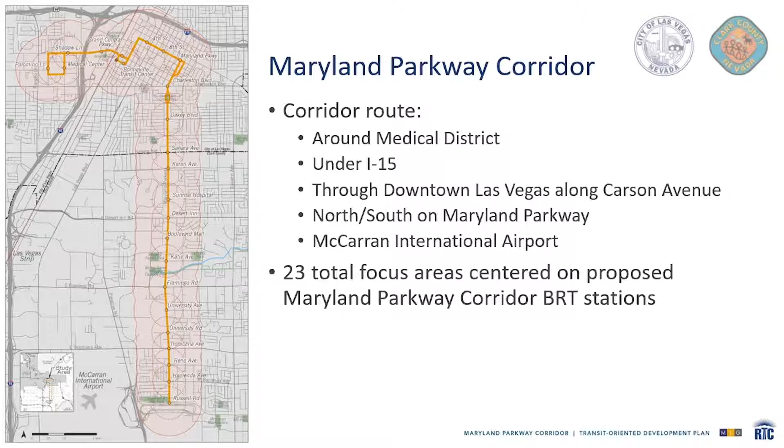In the city of Las Vegas, the focus areas include a half-mile radius around each station, so 1 mile across, focusing on the medical center station within the medical district, the Bonneville Transit Center on the west end of downtown, and the Charleston Boulevard station along Maryland Parkway. In the Clark County portion of the corridor, where the dividing line is Sahara Avenue, we actually included Sahara Avenue with a quarter-mile radius. Again, that would be half a mile across for the focus area, Desert Inn Road, Flamingo Road, and University Road.

The last piece that I'd like to touch on before handing it over to Andy is highlighting a couple of the key reports that informed the focus area plans, which we developed as interim deliverables throughout this effort. Reports developed as part of this project included existing condition analyses for the entire corridor, including all 23 stations.

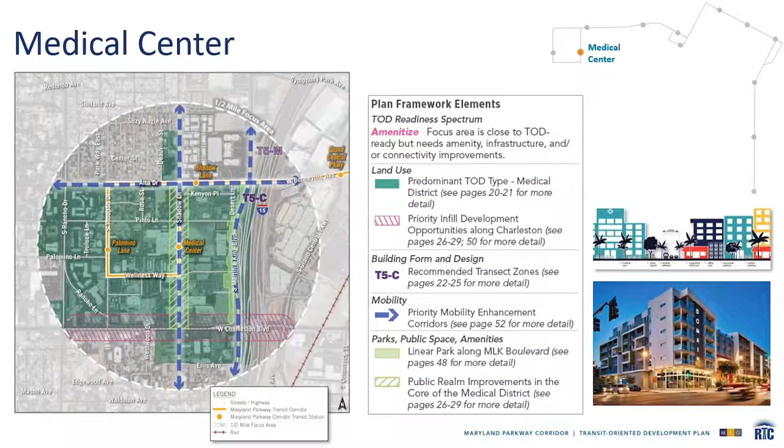For each TOD plan, we've identified a handful of priority projects that are aimed at improving infrastructure, creating or enhancing amenities, and/or kickstarting development in a way that is truly transit supportive. Think walkable, connected, and convenient for those who wish to use transit. All of this is done in an effort to help achieve the vision expressed by the community for each unique focus area.

So within the medical center, our first priority project deals with the intersections along Shadow Lane. The Medical District Master Plan already envisions a really bold future for this area within Las Vegas, and it looks at Shadow Lane as serving as a sort of main street within the medical district. What this priority project is recommending is to really leverage that identity and create a stronger sense of place.

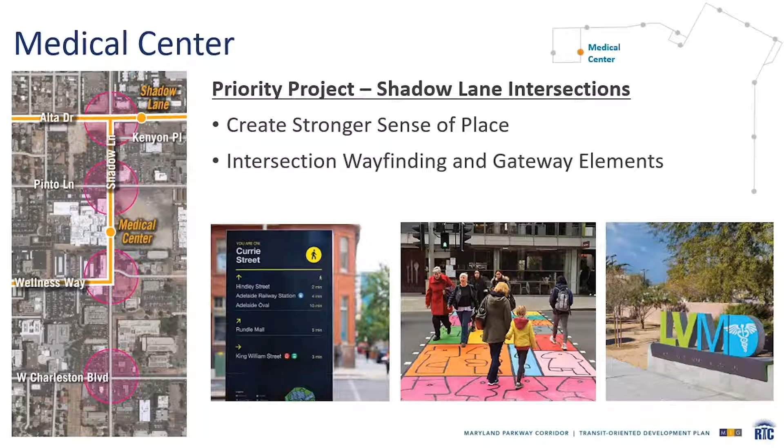By picking key intersections along Shadow Lane that can be treated in an extra special way, including wayfinding, gateway elements, perhaps intersection paint treatments, things that really lend to a strong sense of place and identity for the community, but also connect people really intuitively to transportation options.

The second priority project in the medical center looks at the eastern edge of our focus area and recommends a linear park along Martin Luther King Boulevard. Martin Luther King Boulevard today is a fairly well-trafficked, automobile-oriented corridor, and an investment like this would help amenitize that edge along Martin Luther King Boulevard to try to make it truly pedestrian-oriented, helping to accomplish the overall goals of making the environment more walkable within the focus area.

This would be an opportunity for the city to work with existing and future property owners to identify opportunities with underutilized or unused space in front of the properties along Martin Luther King Boulevard to try to help amenitize this space, again, for more pedestrian-oriented use.

Amenities that could come along with this type of investment would be increased tree canopy and shade, the opportunity for a wellness trailhead that would connect directly to the medical district along Wellness Way, opportunities for pocket parks along this new trailhead, and a generous buffer that would allow pedestrians to feel safe and comfortable moving north and south along Martin Luther King Boulevard, set back from traffic.

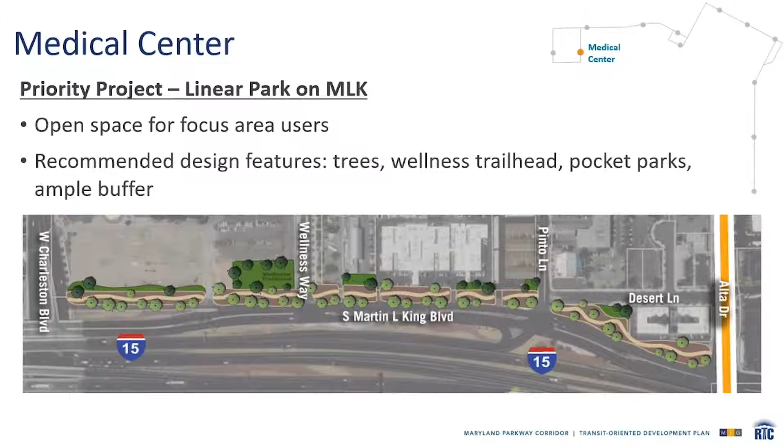The third priority project really looks at trying to diversify the mix of uses within the medical center focus area. Obviously, within the medical district master plan, the vision for this area is predominantly medical uses. This priority project, though, aims at trying to encourage new development to be really intentional about the mix of uses that it includes along with those medical uses.

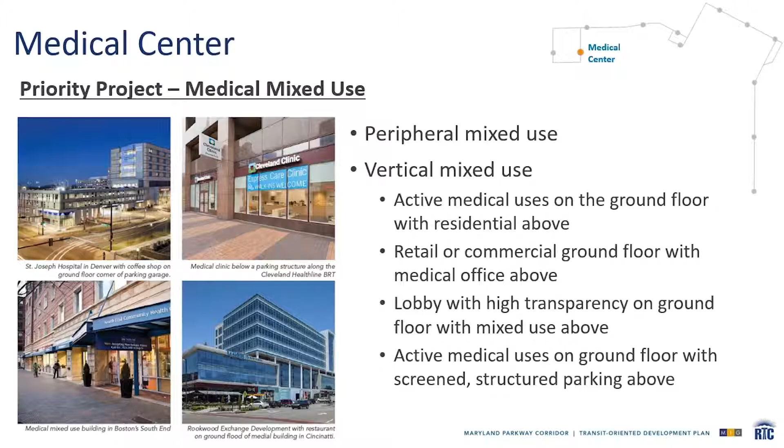For example, trying to integrate residential uses above medical uses in an effort to create activity outside of traditional working hours and the traditional work week. And similarly, being really intentional about getting uses on the ground floor that help contribute to the activity of the streetscape and provide opportunities for those individuals using the medical uses to spend time outside of either their appointments or working days, just opportunities to socialize and recreate.

Our final priority project within this focus area looks at development and pedestrian comfort and amenities along Charleston Boulevard. Charleston Boulevard in this case serves as the southern edge of the medical district itself, and this priority project aims to provide recommendations for building frontages, heights, densities, an appropriate mix of uses, and the corresponding pedestrian amenities that would come along with that strategic infill to help transform this portion of Charleston Boulevard into a true gateway for the focus area and into the medical district itself.

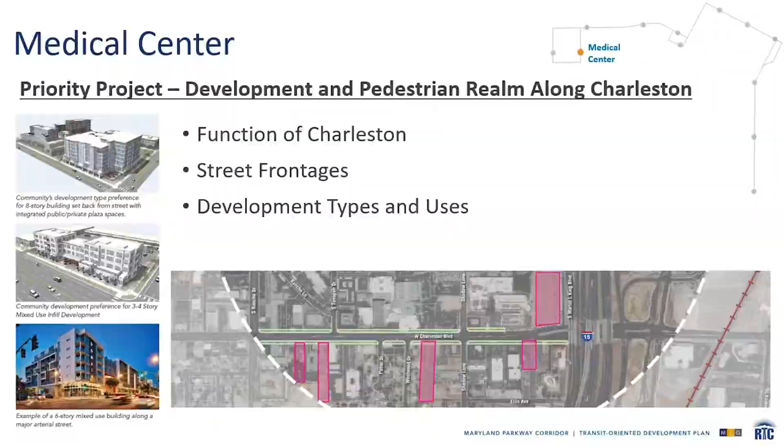This focus area is centered around the Bonneville Transit Center in central downtown Las Vegas. Currently, this area is primarily commercial, office, and civic land uses. There are also community facilities and a good amount of vacant land, but limited residential options. Major destinations or landmarks within this area that you might recognize are BTC itself, the Las Vegas North Premium Outlets, Symphony Park, the Las Vegas City Hall, Clark County Government Center, and many more.

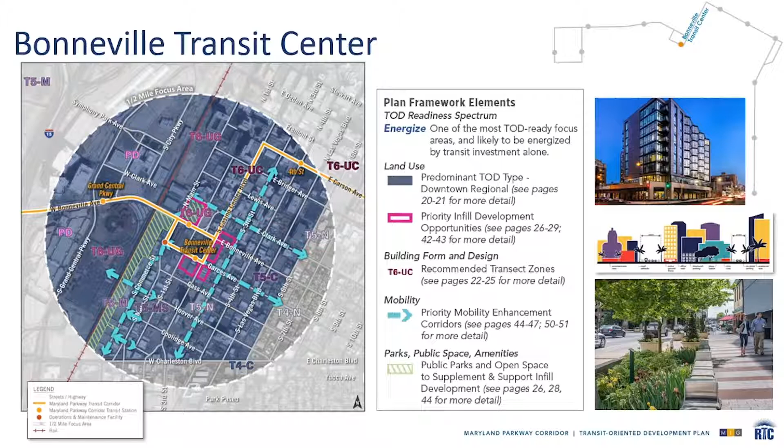For each TOD plan, we've identified a handful of priority projects that can really help improve the infrastructure, kickstart transit-oriented development, and achieve the community's vision within these focus areas. The first project within the BTC focus area is BTC and Civic adjacent development opportunities.

As seen on the map in pink, there are opportunities to combine parcels that are currently vacant or underutilized and integrate a mix of uses, especially with active ground floors with office or residential above that create an active and walkable pedestrian environment. There's also the opportunity for a TOD interfacing civic space at the block between Main, Bonneville, First, and Clark. A conceptual rendering of that block is shown on this page.

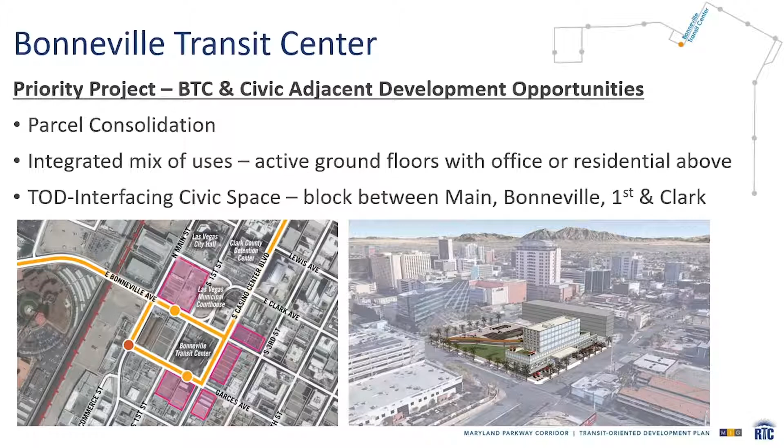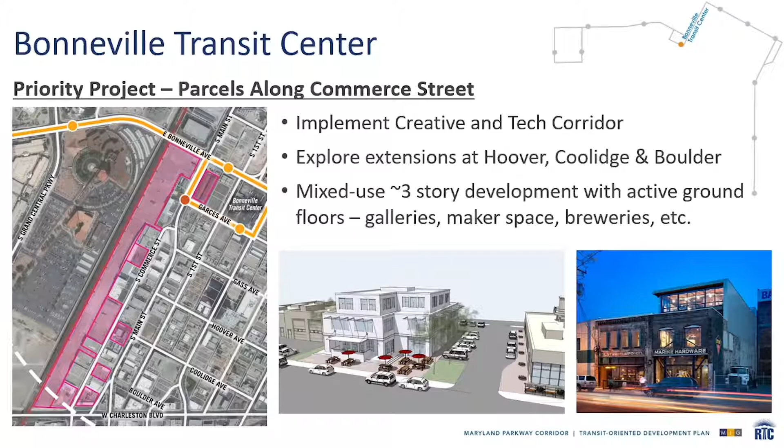New development is envisioned to be about 3 stories with active ground floors, maybe with different uses such as galleries, makerspace, or breweries.

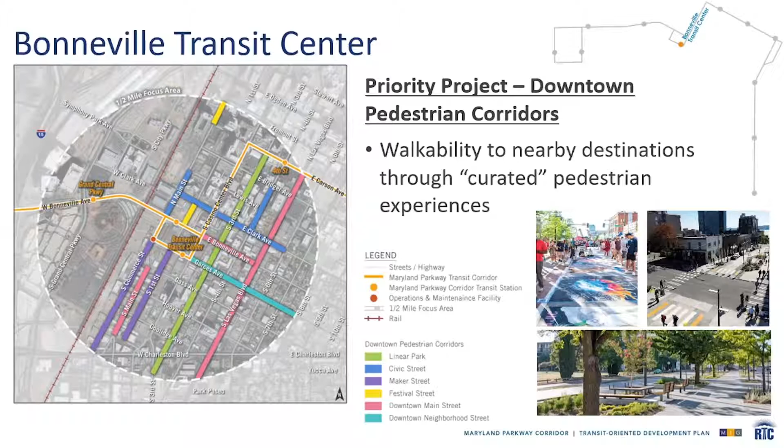The last priority project for the Bonneville Transit Center focus area is Art District branding and wayfinding. This project looks at leveraging all the recent work and momentum from 18B Art District and continuing to realize that cultural hub character. The plan looks at additional options for amenitizing the public realm with branded elements, implementing a pedestrian-scaled wayfinding program, and pairing that with design standards that enrich and preserve the unique character of the area.

The next TOD plan we'll take a look at is for the Charleston Boulevard focus area. Like the Medical Center and Bonneville Transit Center focus areas, this focus area extends a half mile in all directions from the proposed station location, in this case the intersection of Maryland Parkway and Charleston Boulevard.

The area is currently made up of primarily single-family residential uses in the southern portion of the focus area, with a mix of commercial uses in the north and along Charleston Boulevard itself. Major destinations and landmarks within the area that you might be familiar with include the Huntridge Theater, Huntridge Circle Park, the Las Vegas Academy of the Arts, and John S. Park Elementary School, among many others.

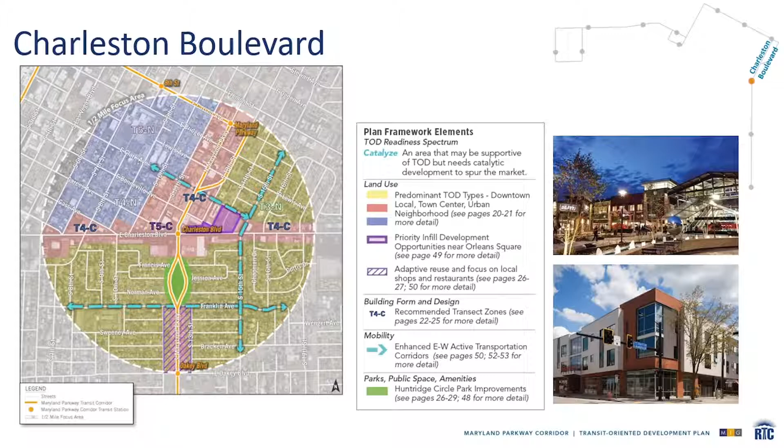This plan also identifies improvement opportunities for Huntridge Circle Park and the adaptive reuse of buildings along the Maryland Parkway corridor to help retain their local character while leaving open the opportunity to evolve into different uses in the future.

As you've seen for each of the TOD plans, we've identified a handful of priority projects here in the Charleston Boulevard focus area that are aimed at improving infrastructure, creating or enhancing community amenities, and/or kickstarting development in a way that is truly transit supportive to help achieve the vision expressed by the community for each of our unique focus areas. For the Charleston Boulevard focus area, the first of those priority projects looks at improvements to Huntridge Circle Park.

This priority project aims to establish Huntridge Circle Park as a community destination, both for the surrounding neighborhoods but also for new transit users within the area.

It's important to note that the recommendations within this priority project amount to more than just cleanup. We've heard concerns from the community about safety and visibility, and longer-term solutions look at including security, long-term maintenance, and management both of the park and the surrounding amenities, whereas short-term solutions look at more soft enforcement and directing those that are occupying the park for longer durations towards community resources and social services.

The second priority project in this focus area provides recommendations for development near or within Orleans Square, and particularly along the frontage of Charleston Boulevard.

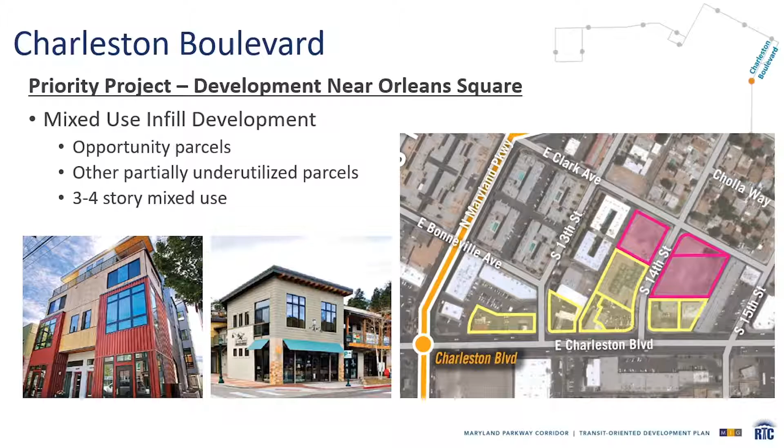This priority project looks at opportunity parcels and underutilized parcels within this smaller geography and provides recommendations on the types of mix of uses, building heights, and densities that could help frame a consistent edge along Charleston Boulevard, making it more pedestrian friendly and providing a comfortable transition from downtown into the neighborhoods.

The final priority project within this focus area looks at how best to connect the nodes that already exist within this focus area to the surrounding neighborhoods themselves. Building off the momentum of the previous project that looked at development and infill opportunities in and around Orleans Square, this priority project acknowledges the existing mixed use and commercial development momentum around the intersection of Charleston Boulevard and Maryland Parkway, as well as along the frontage of Maryland Parkway south of Huntridge Circle Park.

This priority project then looks at opportunities to connect those nodes better to the surrounding neighborhoods and into and out of downtown, with stronger east-west and north-south bicycle and pedestrian connections. It also speaks to continuing the house-to-business conversion trend along Maryland Parkway that helps retain the unique character within the focus area while still providing opportunities for uses to evolve over time.

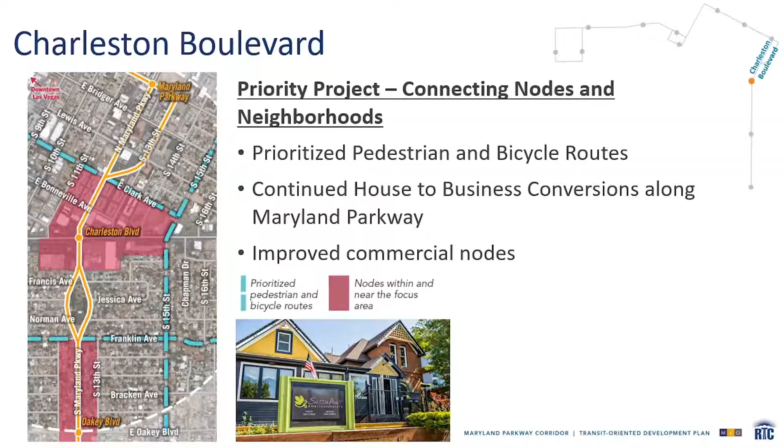This focus area is centered around the station at the intersection of Sahara Avenue and Maryland Parkway. Here we're looking at a half-mile radius from the station. The focus area is half within the city of Las Vegas and half within unincorporated Clark County.

Currently, this area is primarily commercial land uses with some supportive multifamily residential. Major destinations or landmarks within this area include the John C. Fremont Middle School, City Impact Center, Commercial Center, New Orleans Square, Las Vegas Athletic Club, Smith's Grocery Store, and Baker Park.

This focus area has a somewhat unintuitive pedestrian network besides along the major corridors. This plan identifies a handful of connections as priorities for multimodal mobility enhancements. This plan also identifies the need for parks or open space near the major intersection to serve the community in the area, business patrons, and transit riders.

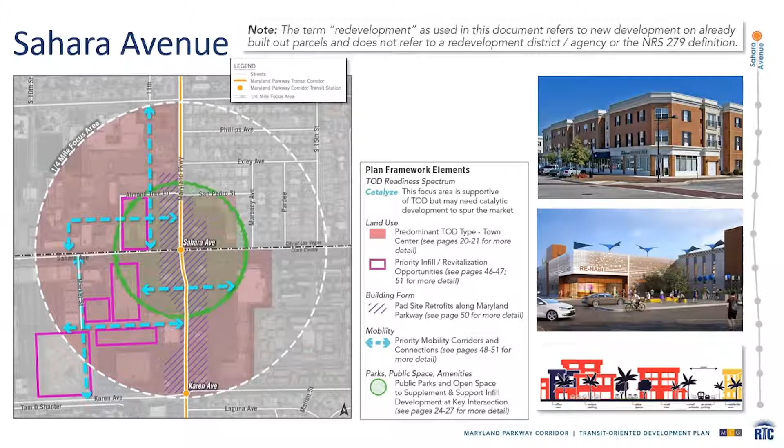The first priority project within the Sahara Avenue focus area is infill or revitalization opportunities on the southwest quadrant. Recently, the redevelopment agency has been reestablished in Clark County. There are opportunities within this area to develop mixed-use infill with an emphasis on affordable housing, especially on parcels that are currently vacant or underutilized. There's also the opportunity to reuse or redevelop existing vacant buildings. Within this project, we also looked at potential new connections, both east-west to Maryland Parkway and an extension of Market Street to the south, as shown in blue arrows on the map on this page.

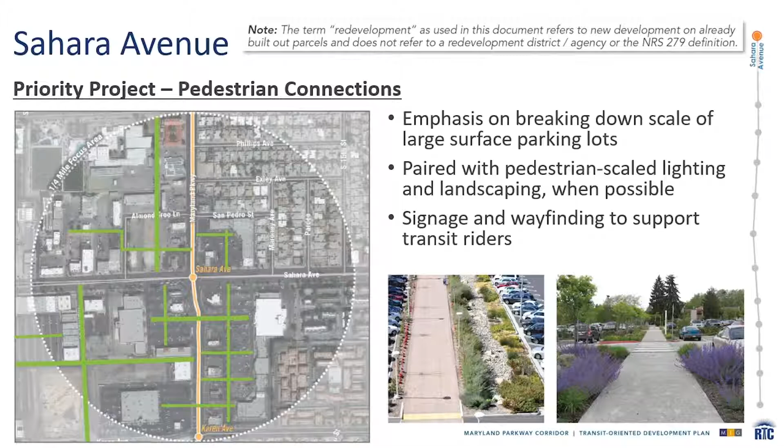The next priority project for Sahara Avenue focus area looks at pedestrian connections. This focus area has a lot of large surface parking lots without formal or safe feeling pedestrian connections between the stores and the street. This project has an emphasis of breaking down the scale of these large surface parking lots, as well as enhancing them through pedestrian scaled lighting and landscaping when possible. Also in these areas and along these connections, we recommend signage and wayfinding to support transit riders who may be navigating from the businesses to or from the transit station.

The next priority project in this focus area looks at the potential for pad site retrofits or urban design improvements, in particular along Maryland Parkway. This project is written in a way that different properties may reach different phases of design, as color-coded in these graphics and on the map. The idea is to transform these auto-oriented uses to be more transit-oriented and creating more friendly places for pedestrians and bikes.

Within the first phase, it could include landscaping and facade upgrades, as well as shade improvements. Second phase could include a drive aisle reconfiguration, seating outdoors, and transparency into the building to activate the pedestrian realm. Lastly, there's the potential for adaptive reuse of a pad site designed building, increasing the capacity of that building, creating a mix of uses, and removing the auto-oriented drive-through.

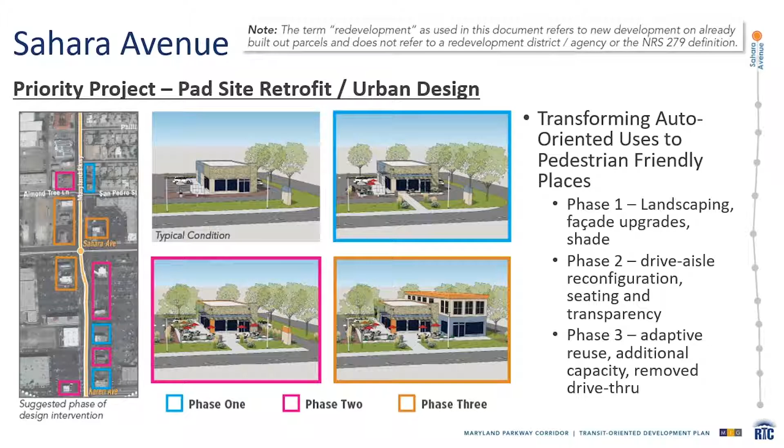The last priority project for the Sahara Avenue focus area looks at the possibility for redevelopment and public realm improvements in the northwest quadrant. Vacant and underutilized parcels in this prominent location provide both short-term and long-term redevelopment opportunities, should the property owners choose to do so. More short-term potential redevelopment opportunities are shown in an orange outline on this map. Blue outlines represent areas that are more long-term redevelopment opportunities due to existing buildings and potentially requiring the consolidation of parcels. The diagram also shows enhanced pedestrian connections in red arrows that would create a better network within this area. Any new development in this area is envisioned to be small-scale mixed-use or multifamily with active retail on the ground floor.

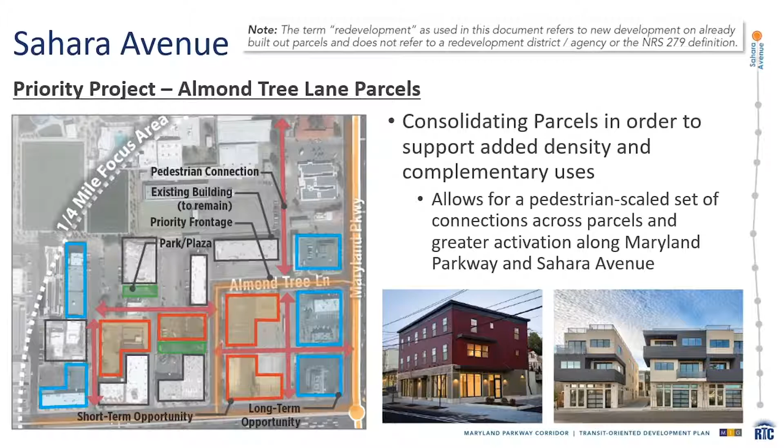This focus area is centered around the intersection of Desert Inn Road and Maryland Parkway, and it also extends a quarter mile in all directions from the proposed station location. Located just south of Sunrise Hospital, the area is currently made up of primarily commercial and supportive medical uses with larger areas of surface parking and a mix of single and multifamily residential. Major destinations and landmarks that you might be familiar with in the area include the Sunrise Hospital itself, Las Vegas Country Club, and Boulevard Mall.

...and voiced as a desire by the community thus far would be a mix of uses that supports the medical uses already existing around Sunrise Hospital, as well as a mix of shops and restaurants that nearby residents and transit users could easily walk or bike to and from.

The plan also identifies a handful of connections that would help provide safer access for nearby residents to the Maryland Parkway corridor itself. Finally, other recommended improvements include identifying opportunities for publicly accessible private open space that could be encouraged along with new development along the corridor, as well as enhancing the walkability to smaller commercial sites along the corridor itself.

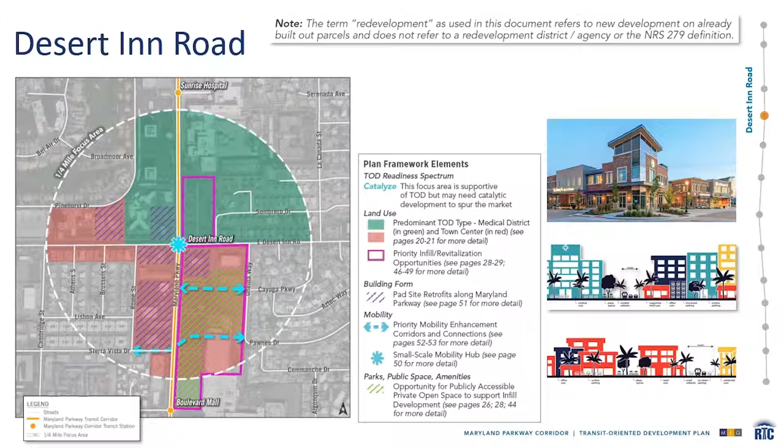As we've done for each of the other TOD plans, we've identified a handful of priority projects within the Desert Inn Road focus area that are aimed at improving the infrastructure, creating or enhancing additional amenities, and/or kickstarting development in a way that's truly transit supportive to help us realize the vision expressed by the community in this unique focus area.

Within the Desert Inn Road focus area, the first of these priority projects looks at infill and revitalization opportunities around the Boulevard Mall. This project recommends that as this area looks to develop or redevelop in the next 20 to 30 years, it should be really intentional about finding opportunities to provide additional community amenities. That can be in the form of publicly accessible private open space, a more varied mix of uses, and/or infill development right along the Maryland Parkway corridor itself to help create a more walkable and welcoming environment along that frontage.

Importantly, it also looks at providing safer and more intuitive connections across the large surface parking lots and into the neighborhoods to the east, making sure that residents have convenient and safe access to the Maryland Parkway corridor itself and opportunities for increased transit.

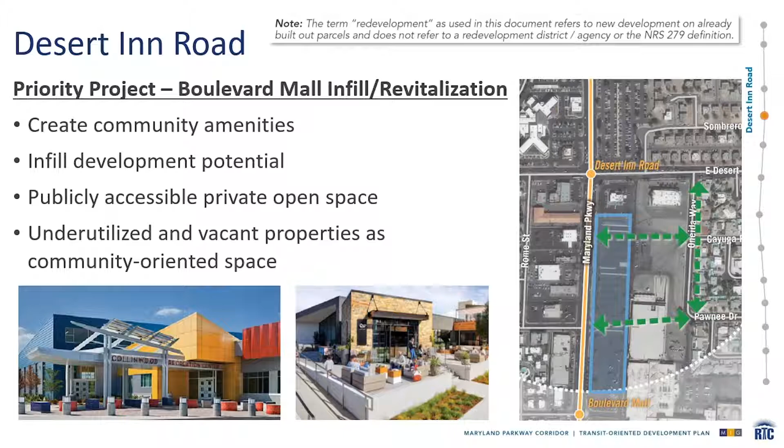This strategic infill could take the form of medical uses stacked on top of active ground floor uses like shops and restaurants, or in the form of residential and office opportunities stacked on top of medical uses. It could also take the form of a more horizontal mixed use, where an adjacent building that doesn't have a medical use could help support the activity and vibrancy of an existing medical use on the property next to it.

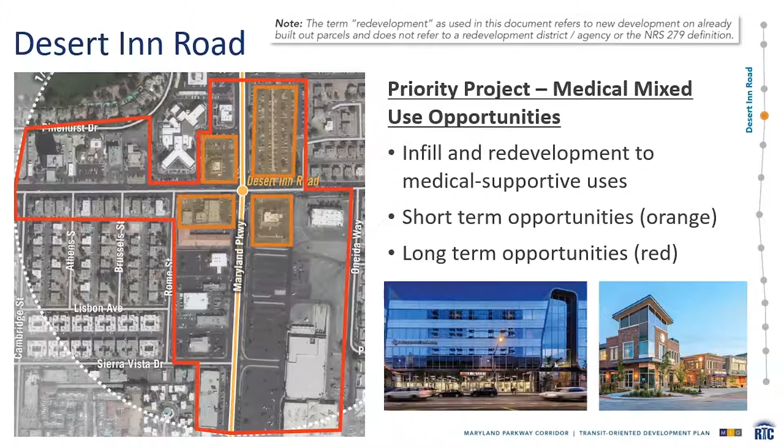Our third priority project for this focus area explores enhancements to transportation opportunities within the focus area. For this priority project, that comes in the form of a small-scale mobility hub opportunity that could be located nearby the intersection of Maryland Parkway and Desert Inn Road. Leveraging the momentum of these two major mobility corridors, a mobility hub would help provide transit users safe and intuitive access to major destinations along each of these corridors.

A mobility hub allows transit riders to have safe and convenient access to bicycles, scooters, or other micromobility options that can help make their journey much easier on that first or final mile of their connection to transit.

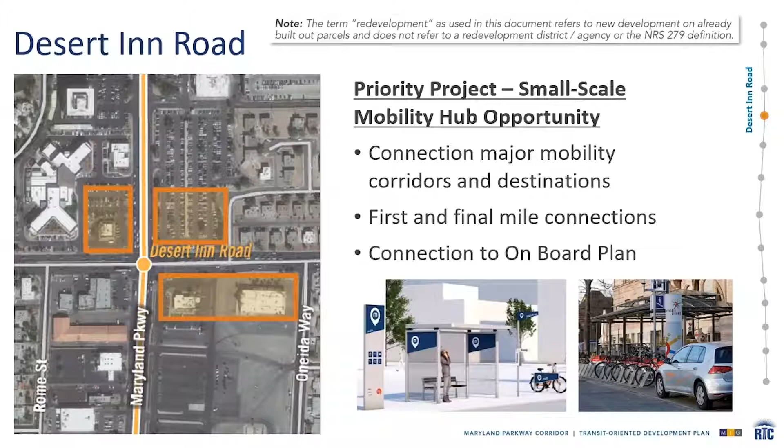Our final priority project for the Desert Inn Road focus area looks at urban design and retrofit opportunities for commercial pad sites along both the Maryland Parkway corridor and the Desert Inn Road corridor. What this project recommends is a series of phases that could be explored by property owners to help transform what are currently more auto-oriented uses to more pedestrian-friendly and transit-supportive uses along each corridor. Each phase could be accomplished independently and doesn't necessarily presume that each of the three phases needs to be accomplished to make something more transit-supportive.

The first phase looks largely at upgrades to landscaping and facade improvements. A second phase that could be explored looks at drive aisle reconfiguration, orienting it more along the parking on the interior of the site rather than along the corridor itself, and providing more pedestrian and transit user amenities like seating and higher transparency along the corridor so users can see the activity that's occurring within the use.

And a potential third phase looks at adaptive reuse of these existing buildings, potentially adding additional capacity or additional uses in order to create an environment that really does cater to transit users and walkability along the corridor.

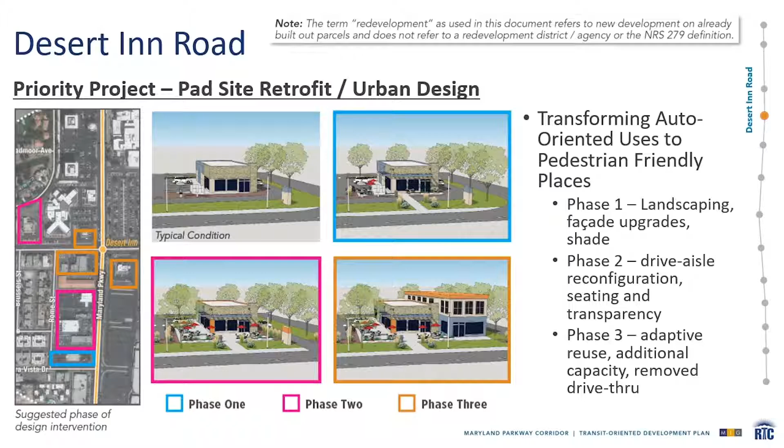This focus area is centered around the station at the intersection of Flamingo Road and Maryland Parkway in the Paradise neighborhood. Currently, this area is primarily auto-oriented commercial with some multifamily residential. Unique assets of this focus area include the Flamingo Wash running along the northern portion, the proximity to UNLV, and some really high-density housing. Major destinations or landmarks within this area include the Clark County Library, UNLV, and Albertsons grocery store.

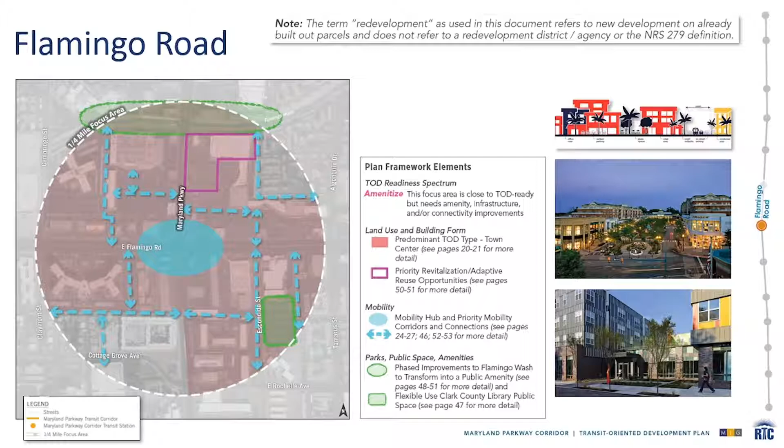This plan also identifies phased improvements to the Flamingo Wash in order to transform that into a public amenity, and the potential for a flexible community space within the currently underutilized parking lot at the Clark County Library.

The first priority project for the Flamingo Road focus area is the opportunity for a large-scale mobility hub near the major intersection and near the proposed stations. A mobility hub in this location can improve people's first and final mile connections, especially for transit riders, and provide a variety of mobility options.

There's a number of areas close to the station, as well as a little farther out, that serve as opportunities for this hub. The On Board Mobility Plan from RTC also provides significant guidance for proposed mobility hubs in the Las Vegas Valley. Any efforts as a result of this plan should and will align with recommendations from On Board.

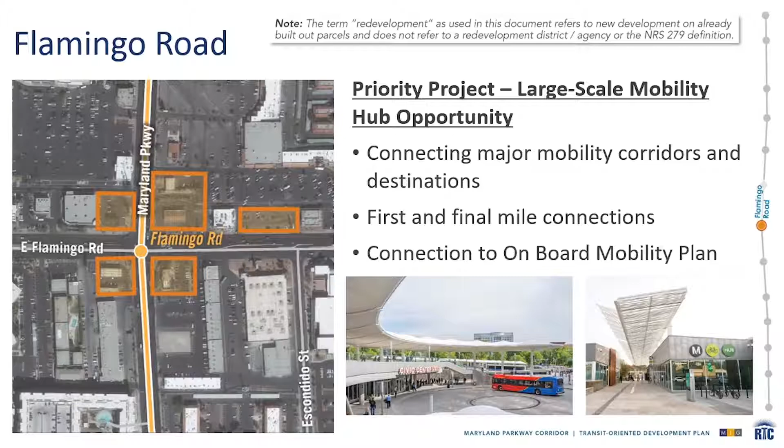The next priority project for the Flamingo Road focus area is the potential of transforming the parking lot by the Clark County Library into a public space. Currently, the parking lot is underutilized and may be larger than it needs to be, so there's an opportunity to create a multifunctional community space and amenity in this location.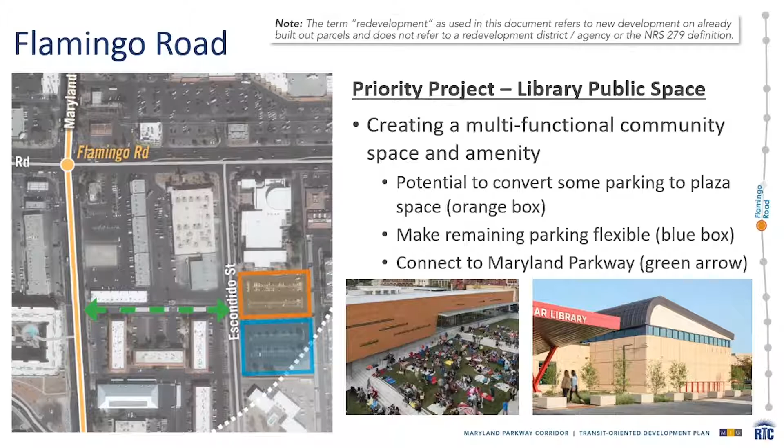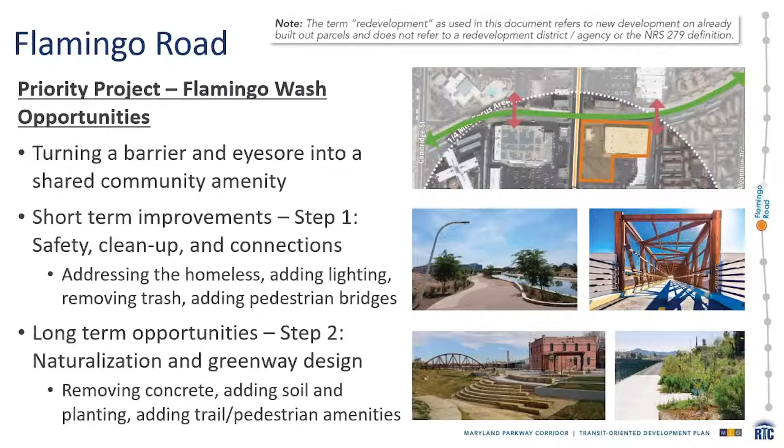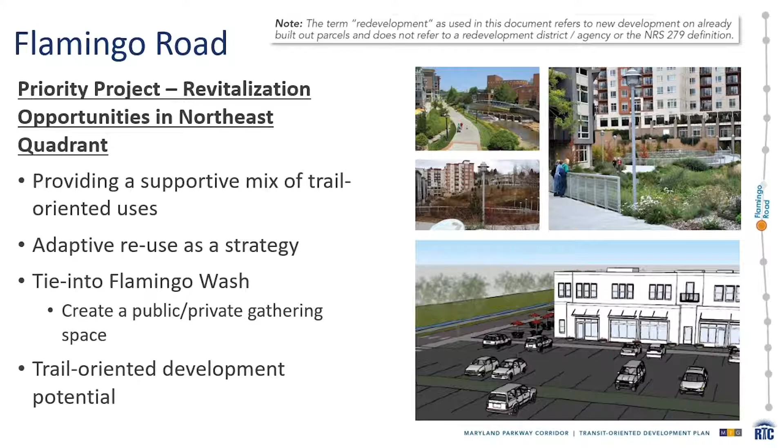The last priority project in the Flamingo Road focus area looks at revitalization opportunities in the northeast quadrant. Following the improvements to the wash that I previously mentioned, this area becomes a prime opportunity for trail-oriented development. This could either be redevelopment or adaptive reuse of the current building. Tying into the new and improved wash provides the opportunity for an additional front door to businesses in this location and the opportunity for new public or private gathering spaces in a pleasant setting.

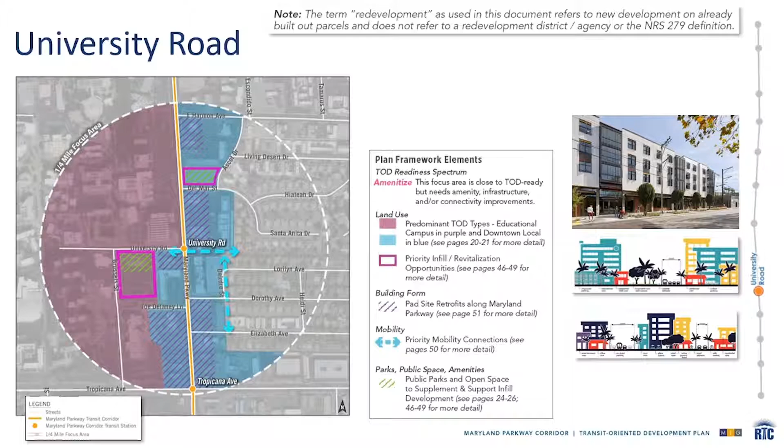Within each TOD plan, we've identified a handful of priority projects that are aimed at improving infrastructure, creating or enhancing amenities, and/or kickstarting development in a way that's truly transit supportive for the rest of the focus area in an effort to help achieve the vision expressed by the community.

For the University Road focus area, our first priority project looks at the UNLV Transit Center and lots U and H and their potential for redevelopment just south of the transit center itself. This priority project recommends a mobility hub in this location that includes iconic architecture and a major public space amenity to help it serve as a gateway into campus and allow surrounding residents who are using transportation to feel more welcome engaging with the campus environment.